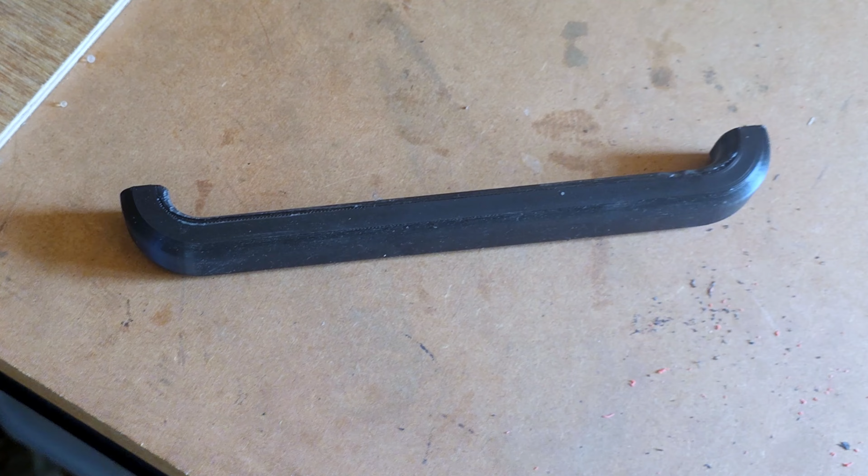So I thought I'd do a bit of an update video on what I've been printing with my Bambu Labs P1S. I bought this machine about 8 months ago, and have printed many things, mostly practical. They tend to be for projects I'm working on, or for storage, hooks, that kind of thing. But I'll show some of those to you. I've found it useful to be able to make the occasional bit of hardware.

That's a handle that I made, used on a drawer set trolley thing that I made. I've printed quite a few of these Gridfinity boxes for storing small parts. Came out quite well, useful.

This one's a little mod that I've done for my keyboard. This is the keyboard on my CNC Plasma. Constantly pushing F5 to start the cycle, so I thought I'd just make a key. Turned out well, you'll see it works.

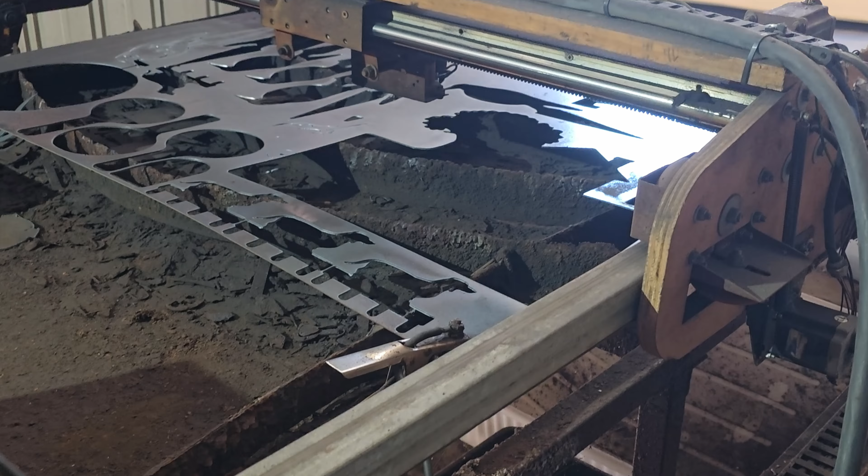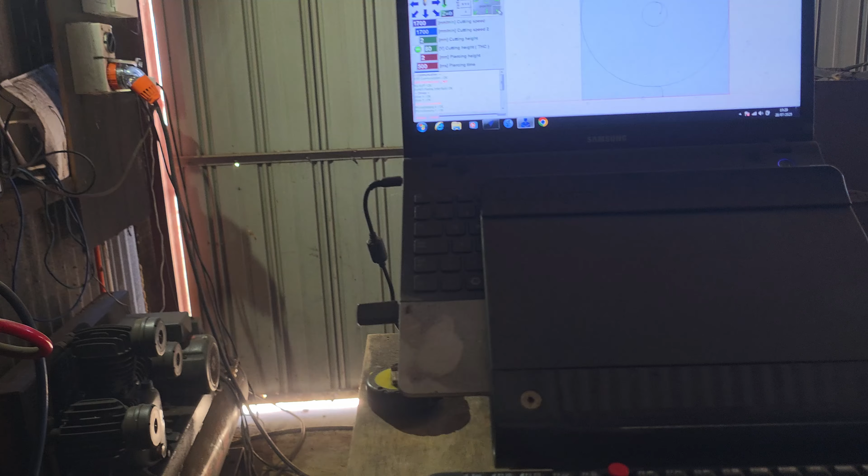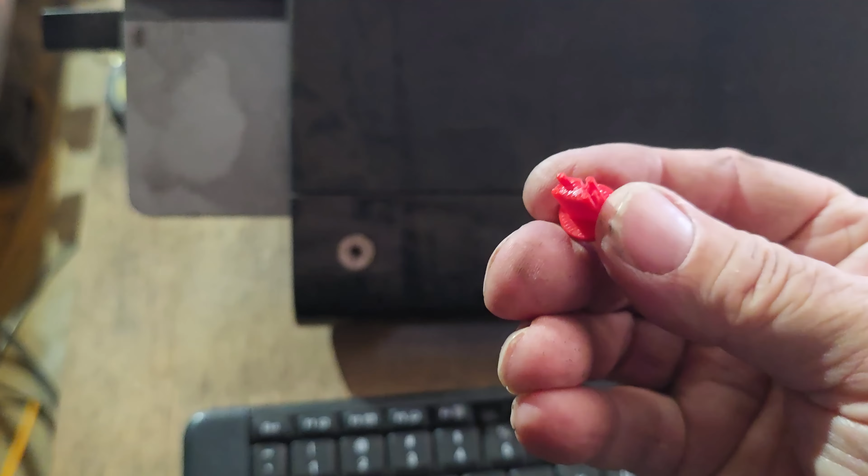That's just a 40mm penny washer, but works good. Took a little bit of modelling. I can actually, maybe you can see it there, but I'll show it in Fusion so you get the idea. It fits.

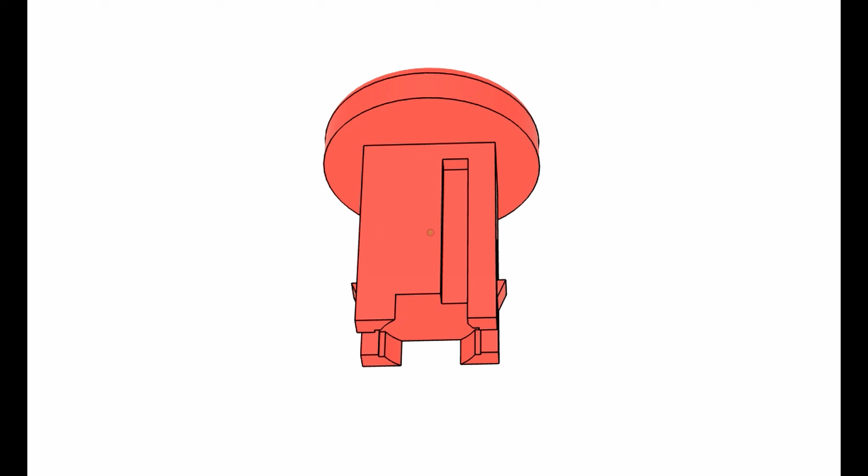So this is the key as drawn in Fusion. You can see it's a fairly complicated feature and it's really tiny, no more than 4mm wide. This is actually the replay of my drawing it, and you can see various mistakes made here.

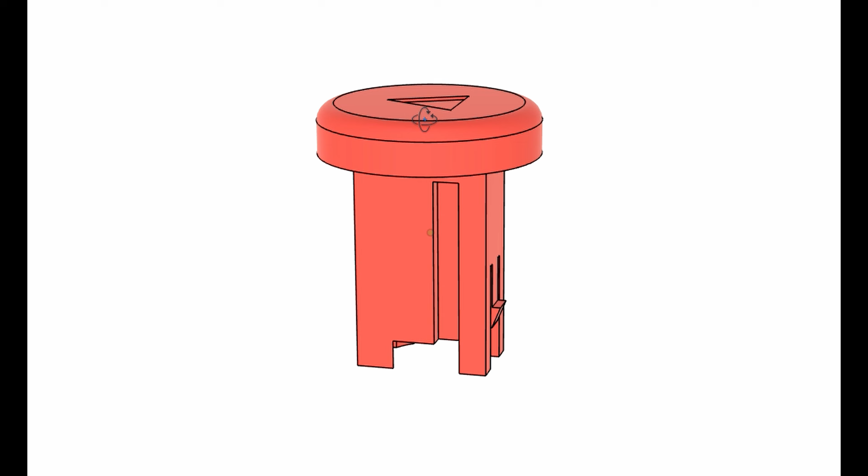I think in my second prototype I actually got it to work, which is not bad going for me. Now I could add different tops to it if necessary. You can see there's a slot on the side that corresponds with the one in the keyboard, and little clips to hold it in.

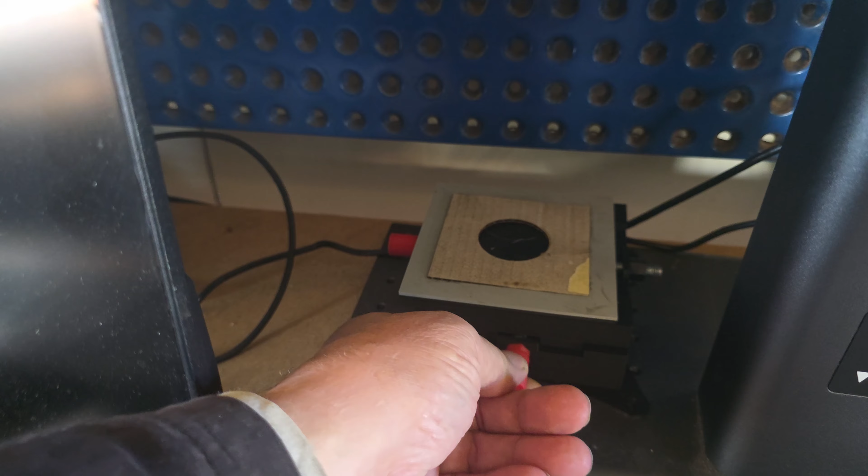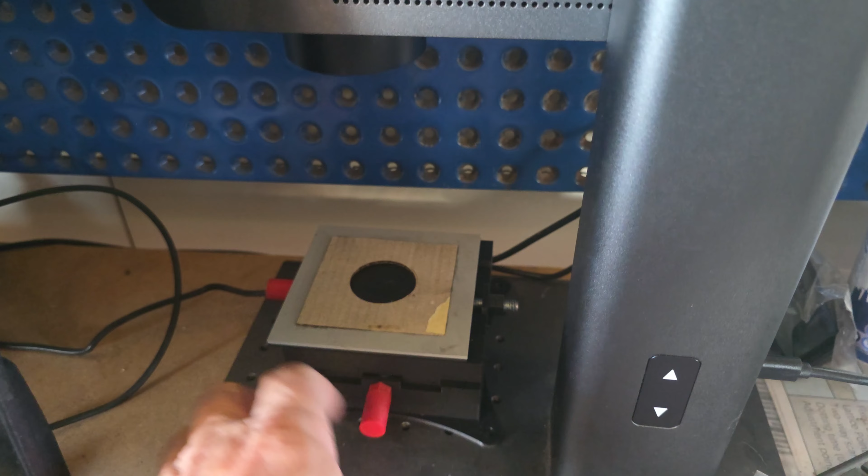So this is a little X and Y table that I made for my Genmitsu fibre laser. It just means that I can get a repeatable position for my piece of work. Otherwise the one I had previously just moved about, or there's no point putting it on the bed for obvious reasons. This is as I designed it in Fusion 360.

It uses some M8 rod for the threads, and the actual thread in the model is modelled in Fusion. And here's how I drew it.

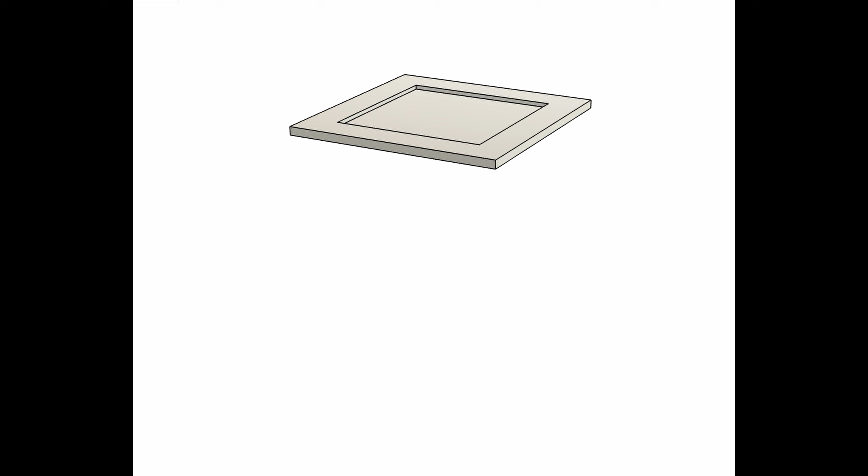Took me quite a few goes to get this right. I think I actually had to have, for parts of it, 3 prototypes to get to the point that it's at now. I probably could improve it, but you can see that the middle one there had to be made in 2 sections, and then I put dowel pins in to hold it together.

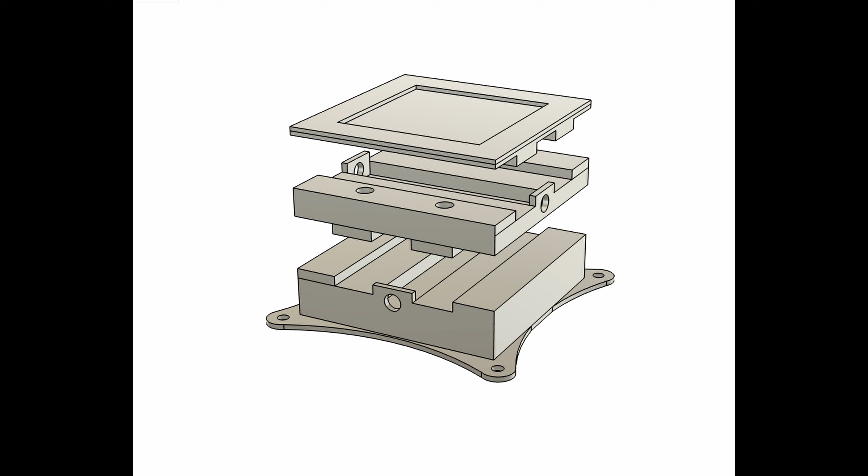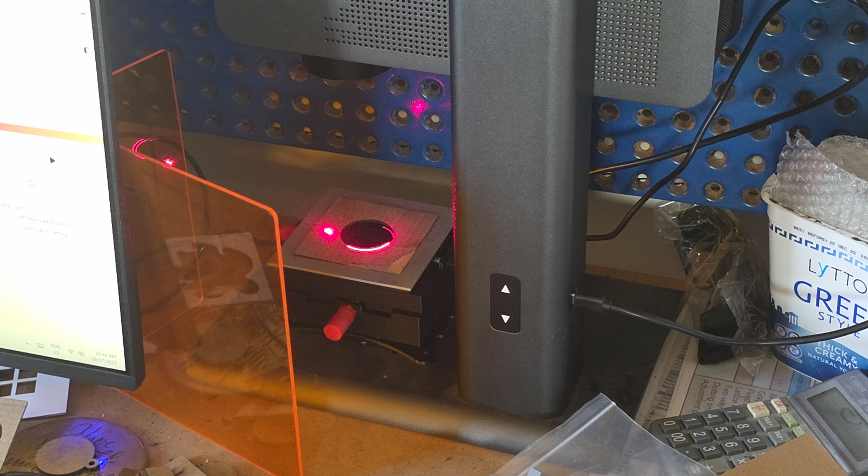And there it is. I didn't put the text on the top in the end. And here it is in use. You can see by doing a frame, maybe I can adjust it so it's bang in the middle. Going the wrong way.

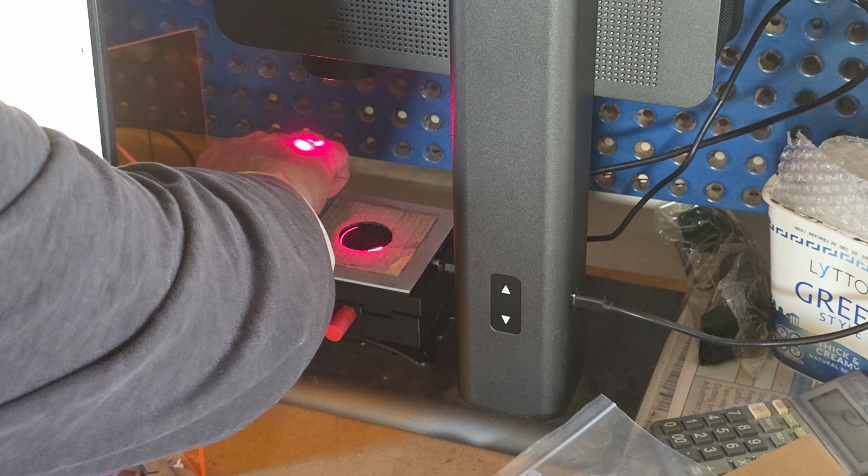And that'll be the image. And there it goes. This is engraved white on black using 2 layers. Does it lightly first, and then we'll go through and do the whiter image. I find that works better for me on this particular fibre laser. It's a fibre laser, or a galvo laser as they call them, a different wavelength to a CO2 or a diode laser.

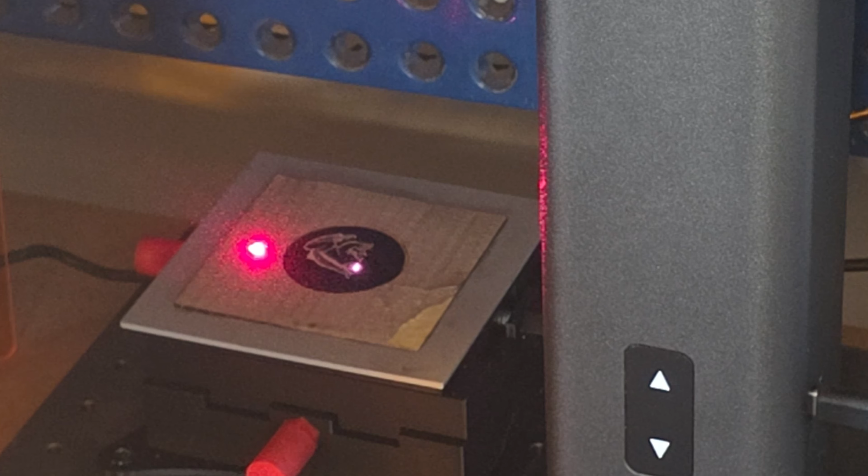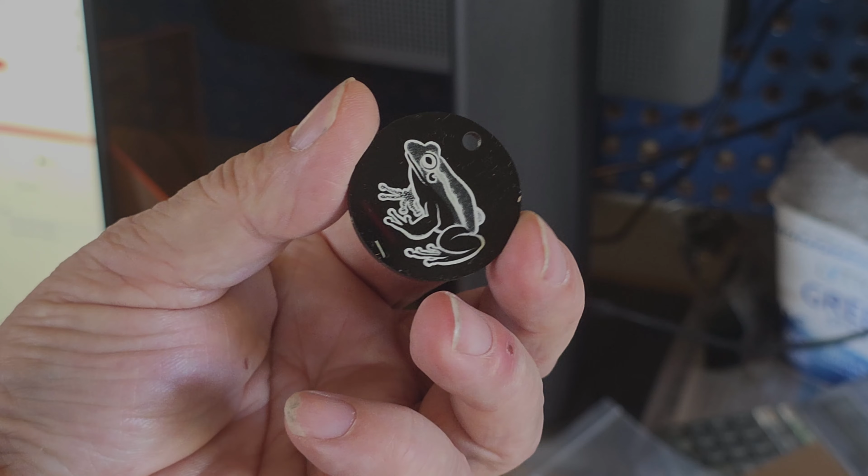And it produces that. Comes up quite white. There we go.

I tend to make mostly practical things, but on occasion I'll make a bit of a model. I quite like that, I think that's modelled extremely well. They're available on MakerWorld, and that's Pluto. But anyway, I painted the body of that one. Mostly practical stuff there.

So this is a little stand I designed for my Fit 3 smartwatch. It uses the original cable that's supplied with the watch and puts it into a stand, as you can see it here. And then you just hang the watch like that when you're at night or just when you're charging it. Works quite well.

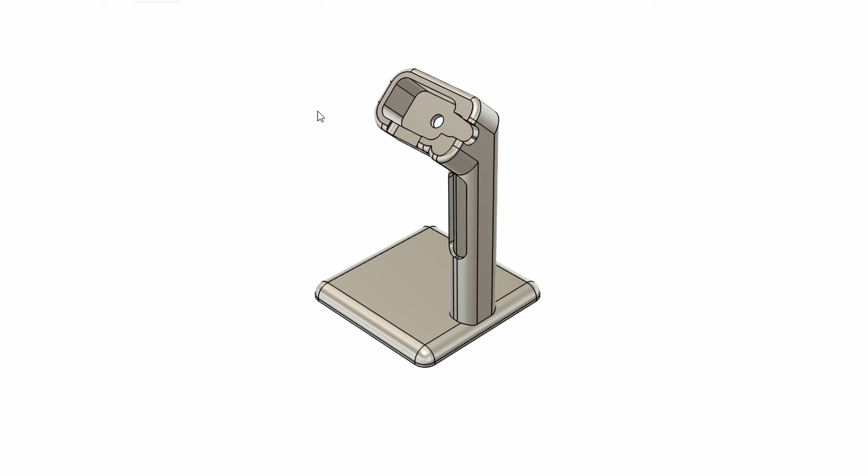Now there are various of these on Thingiverse and MakerWorld, etc, none quite like this one. You can see there I've put a hole in the back so you can actually remove the cable, and then the cable threads down the stem.

And this is how I drew it. It's a bit of a mess, it was quite a difficult one to draw. Some fine features had to be made to make the charge port attach into the head. I keep turning on and off the model as I'm drawing it.

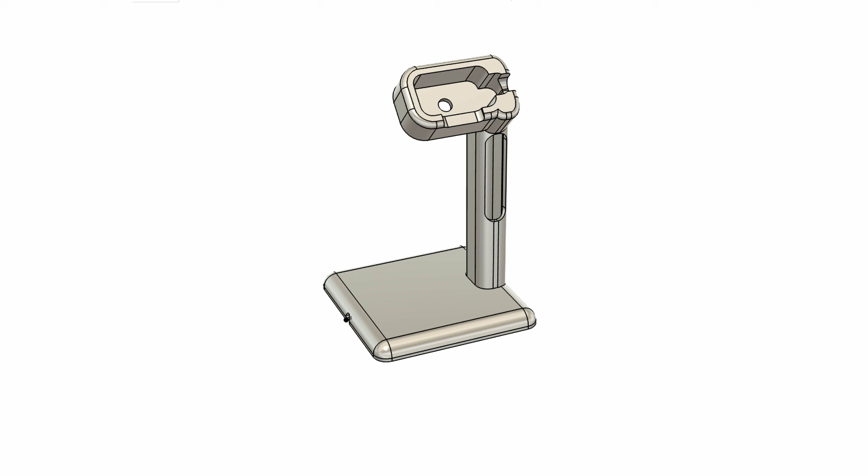So this is an adapter that I made to go on to the end of my wet and dry vacuum cleaner. You see it's quite a complicated thing because it has to fit into something that is certainly not designed for use with this particular vacuum cleaner. It's actually a good brush for getting dog hairs out of cars, and I designed it so that it clips over there and stays on.

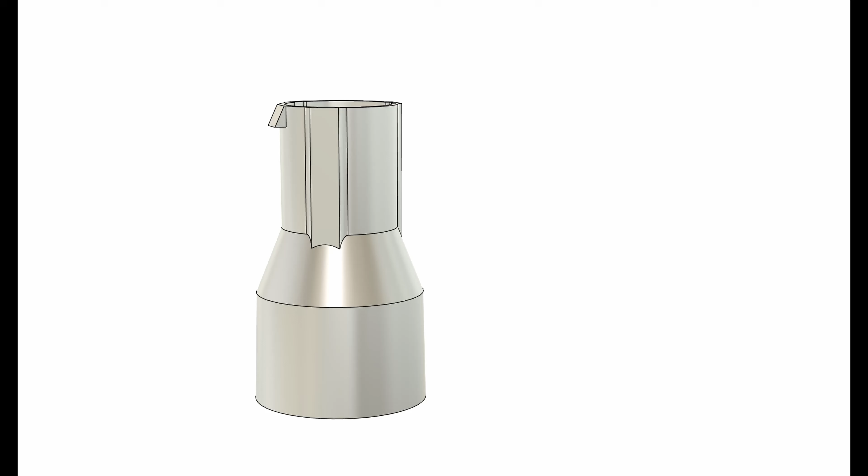Now this has got some quite complicated features. You can see it's got 3 grooves that run down the centre of the tube there, and then has a barbed clip to hold it into the attachment. Once you've worked out those dimensions, it's not too hard to do, but it took me a while.

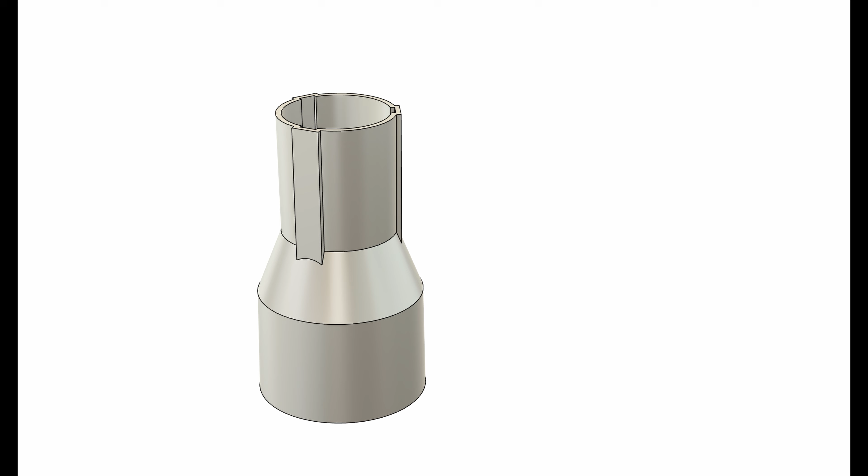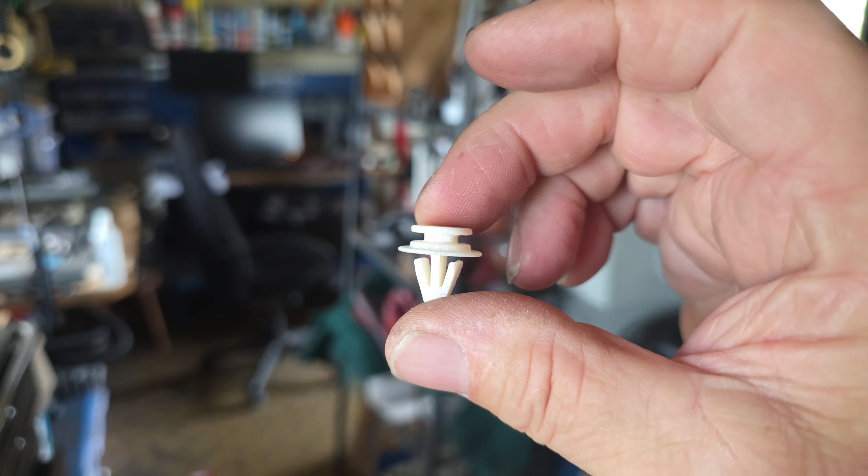So this is a clip that I've made for the trim on my Land Rover Discovery. I had a problem with the trim on the B pillar with the seatbelt adjustment. The seatbelt adjustment thing here was a problem because it had broken free. The trim panel clips, which are behind here and all the way down, just aren't strong enough to hold it. The original ones now are, I suppose, 12 years old on this car, and kept failing, and they just crumble.

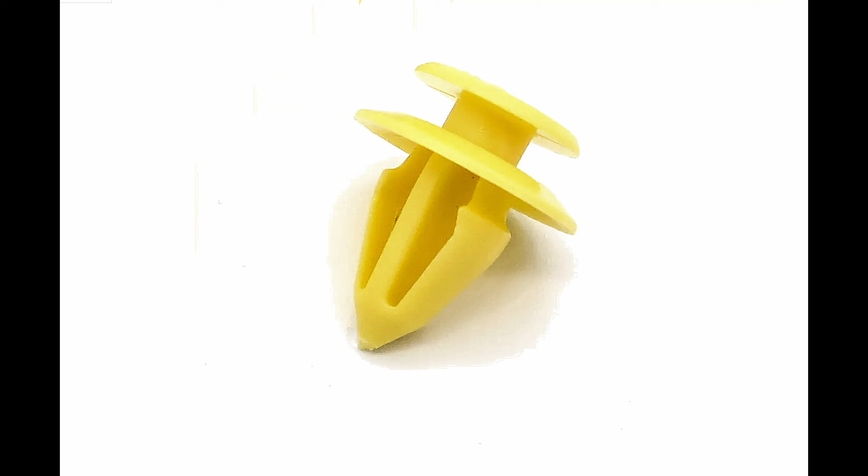So I thought I'd make some better ones, and I made them so they hold the panel in better than the originals. This is an original clip, but I decided to modify it to make it a bit stronger. It's got most of the features of the original clip, but a bit thicker. I printed this in ABS to give it more strength too. This yellow one seemed to go brittle and break easily.

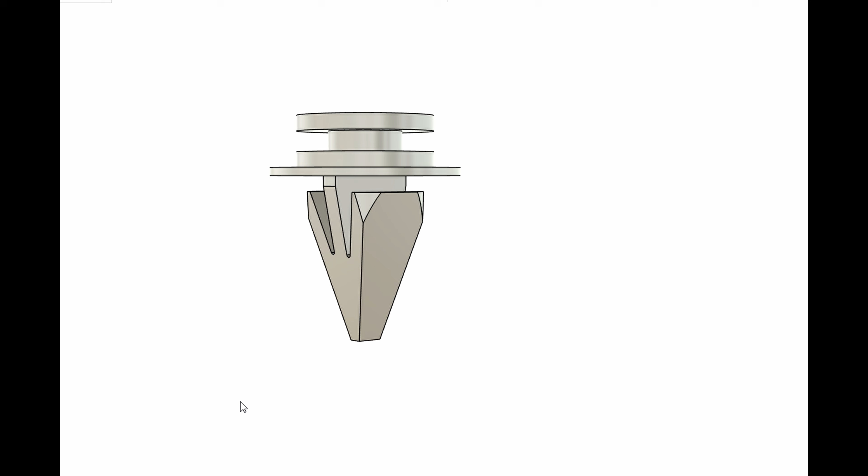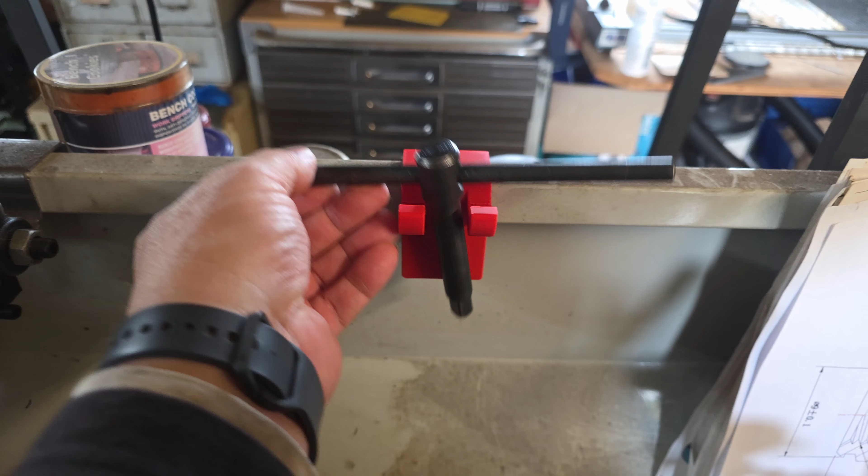So this is my lathe. I just made a small attachment for the chuck key. If you operate a lathe, you'll know it's really important to make sure you don't leave the key in the chuck when you start it up. That's a good way you can potentially kill yourself doing that. There's plenty of designs of these on MakerWorld and Thingiverse. Most of them sort of have a barrel, but I wanted a hanger, so I designed my own, and it works for me, that's good.

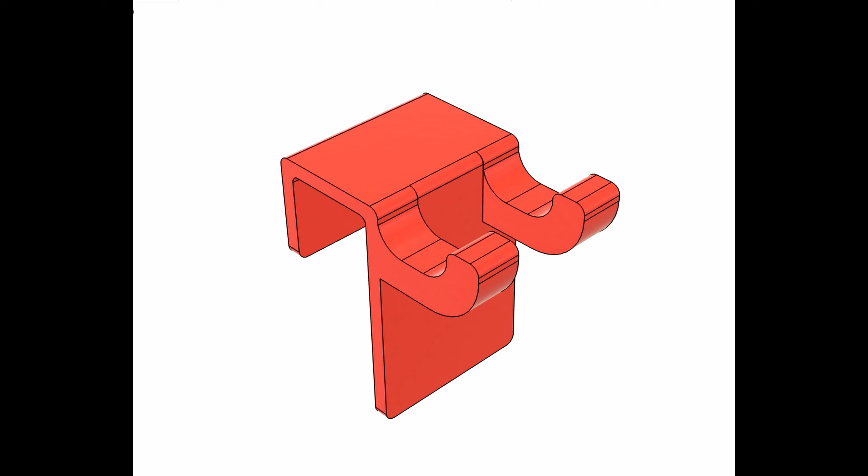So as before, this is my design in Fusion. It's a fairly simple design really, didn't take too much to do it. It's a little loose on the back of the lathe, so I may actually add some 3M tape in there just to grip it on. But as you see, it didn't take long to draw, and I didn't need a prototype. Got it right first time, so that's great.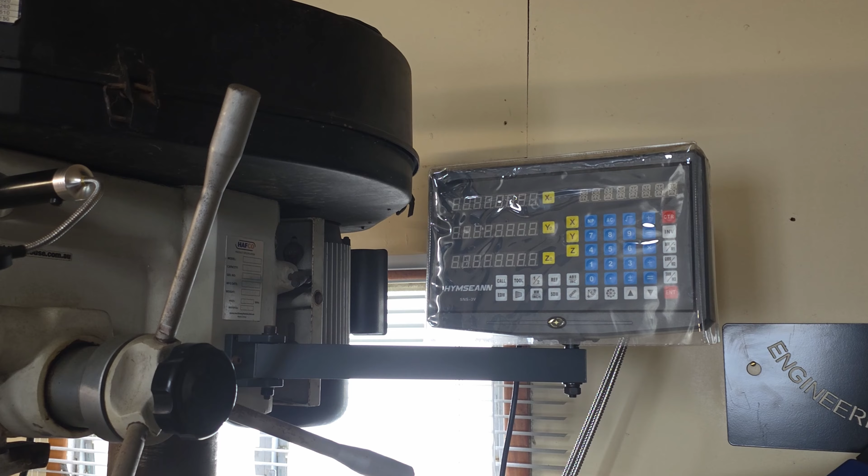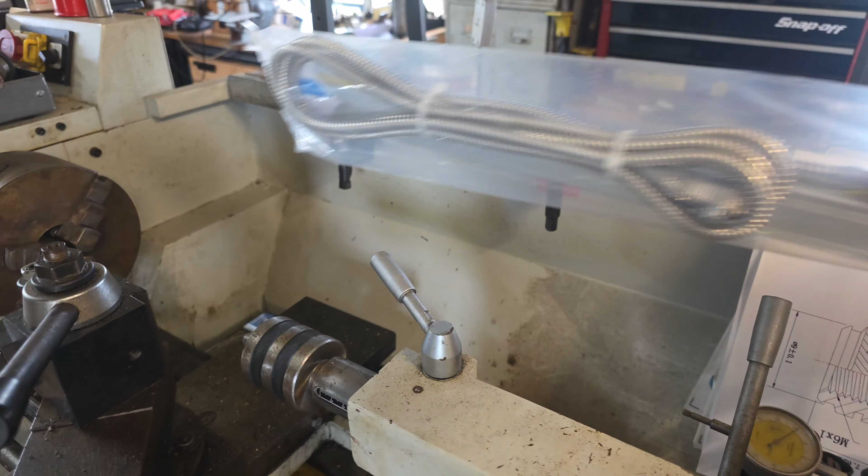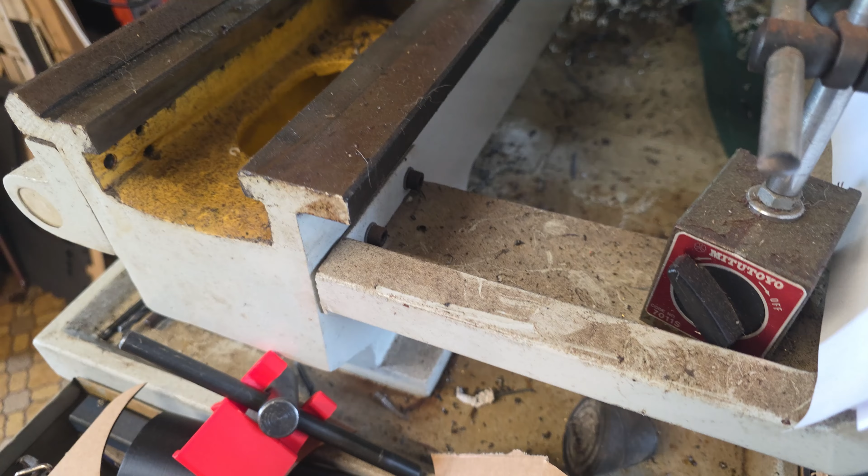Now the other project I have to do on the lathe is install DRO, similar to the one that I have on my mill. I think the 3D printer will help a lot with that. So that long scale there has got to be mounted, it's got to be mounted under here. The carriage moves that backwards and forwards, so I should be able to make some nice brackets, I think. In the past I've always done it with metal, but I think a 3D printer would actually be more elegant. But we'll see, maybe I'll report back on that.

So that's just a handful of the things that I've printed with my 3D printer over the past few months. There are more, and if I remember them, and when I design a few extra ones, I'll upload them, maybe do another video. If something here caught your eye and you'd like to print your own, then just drop me a line and I'll upload it to Thingiverse or MakerWorld.